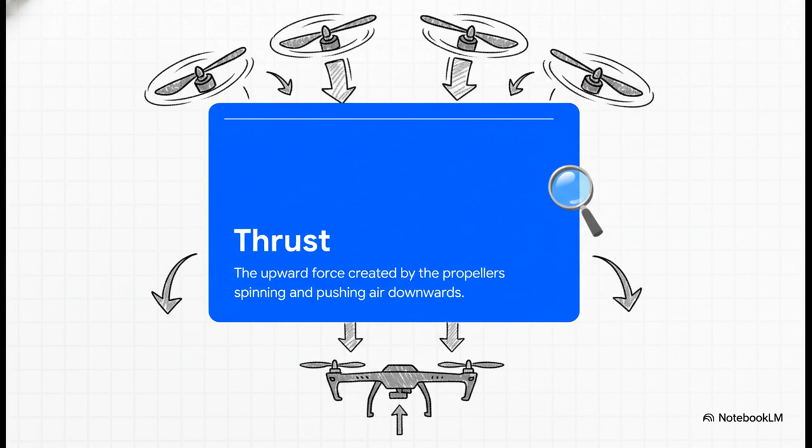The easiest way to think about it is that the propellers are basically really powerful little fans. They're spinning like crazy, grabbing huge amounts of air and shooting it straight down. But wait a minute, if you're pushing air down, how does that make the drone go up? It seems a little backward, right? Well, the secret sauce is all in the shape of the propeller blade. Take a look at it here.

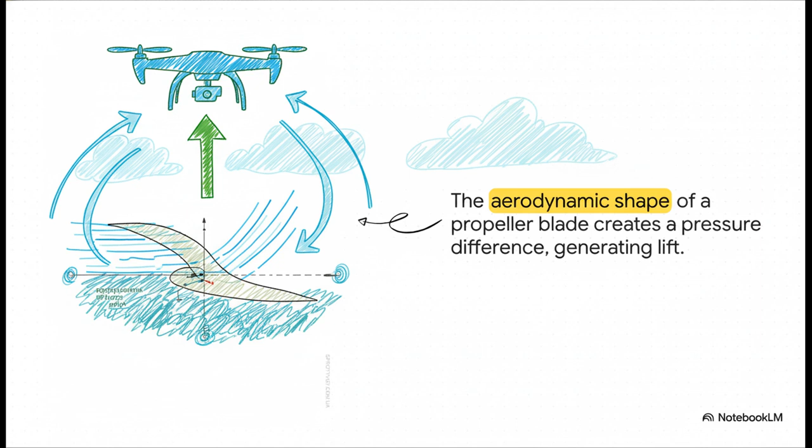It's not just a flat piece of plastic. It's shaped like a tiny little airplane wing, what's called an airfoil. As that blade slices through the air, its curved top makes the air have to travel a longer, faster path than the air going underneath. This creates a pressure difference: you get low pressure on top and high pressure on the bottom. And what does that high pressure do? It pushes up. That's lift.

This is a textbook example of one of the most famous laws in all of physics, Newton's third law. You've heard it a million times: for every action, there's an equal and opposite reaction. The action here is the props shoving a whole bunch of air down. The reaction, the air shoves the drone right back, but up. The drone is literally climbing up a ladder of air that it's building for itself as it goes.

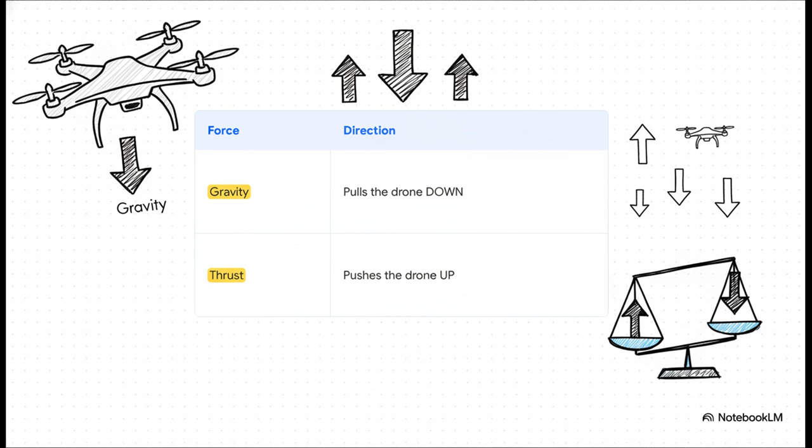How cool is that? So really, flying just boils down to a simple tug of war. You've got gravity pulling the drone down, and you've got thrust pushing it up. When the upward thrust from those 4 propellers is stronger than the downward pull of gravity, the drone goes up. Simple. And when those two forces are perfectly, exactly balanced, that's when you get that magical-looking hover.

All right, so we've solved problem number 1, we're off the ground. But now we have a whole new can of worms to deal with. You've got 4 motors spinning like crazy. What's to stop the body of the drone from just spinning out of control in the opposite direction? Seriously, think about it for a second. If all 4 of those motors were spinning the same way, all that twisting force, that's called torque, it has to go somewhere.

And where would it go? Right into the drone's body, turning it into a little quadcopter Beyblade. It would be totally, completely unflyable.

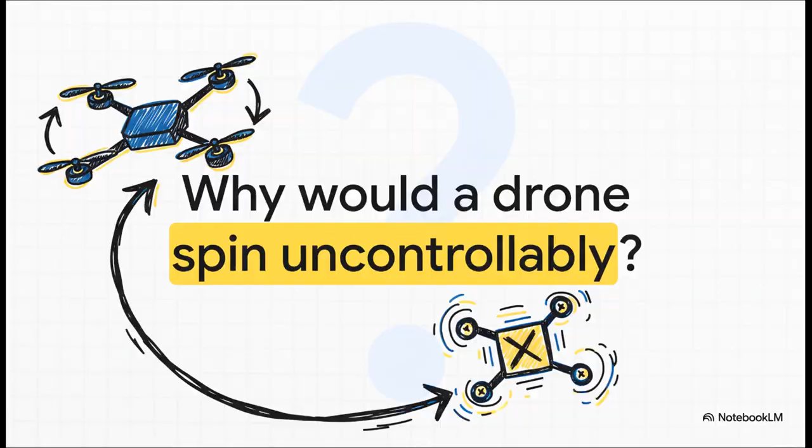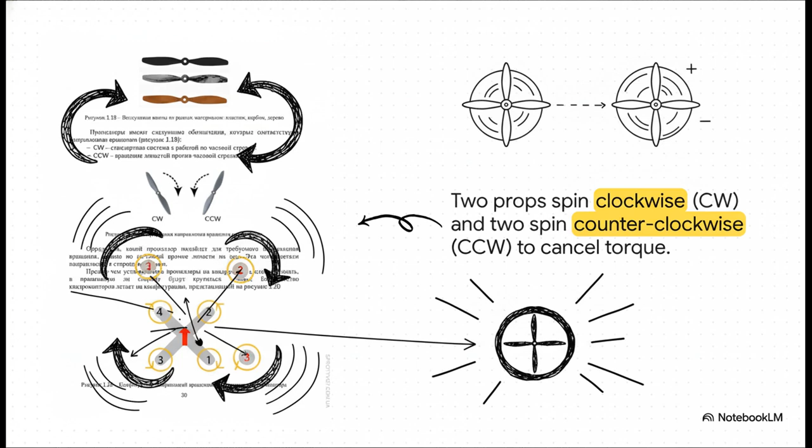But the solution to this is so simple, it's actually genius. Check out the diagram. Instead of spinning them all the same way, they spin 2 of them clockwise and the other 2 counterclockwise. So the twisting force from one pair is perfectly canceled out by the twisting force from the other pair. They just negate each other. And the result? No spin, just a rock-solid, stable platform hanging in the air.

Okay, so we've got a stable hover, that's awesome. But let's be real, a drone that only hovers isn't all that useful. The real fun, the real magic, is in the movement. So how do we take this perfectly balanced system and tell it to go somewhere, and fast?

It's actually pretty counterintuitive. You do it by unbalancing everything, but in a very, very controlled way. Every single movement a drone makes, every turn, every tilt, every forward sprint, it all happens because it's deliberately creating an imbalance between those 4 motors.

The easy stuff is pretty straightforward. You want to go up? You speed up all 4 motors at the same time, more thrust. You want to come down? You slow them all down together. And to get that perfect hover, you just find that sweet spot where thrust and gravity are perfectly matched.

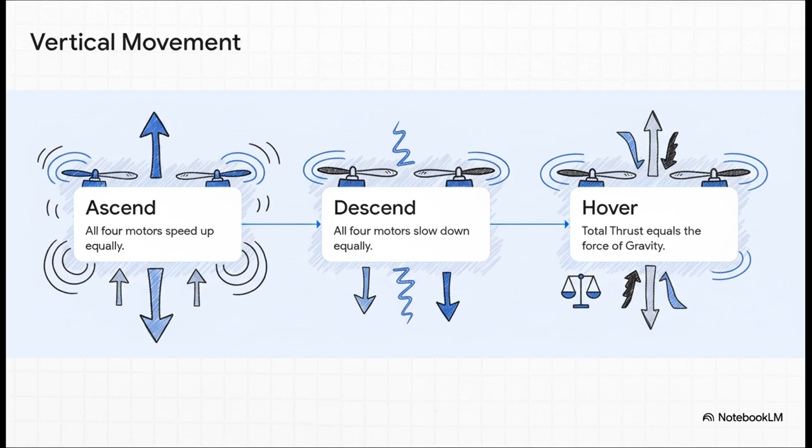But what about going forward? Okay, this is where it gets really smart. To make the drone move forward, that's called pitch, all you do is speed up the 2 motors in the back. That creates more lift in the rear, which naturally makes the drone tilt forward. Now think about it, the propellers are still pushing down, but since the drone is tilted, down is now also slightly backwards. So the reaction force pushes the drone up and forward. The more you tilt it, the faster you go.

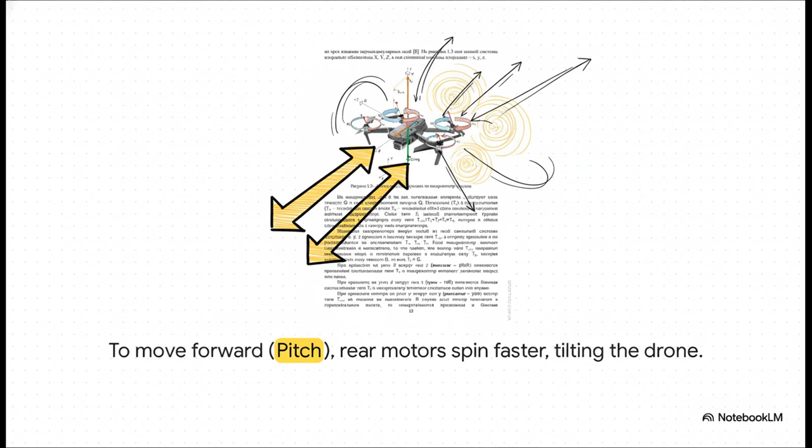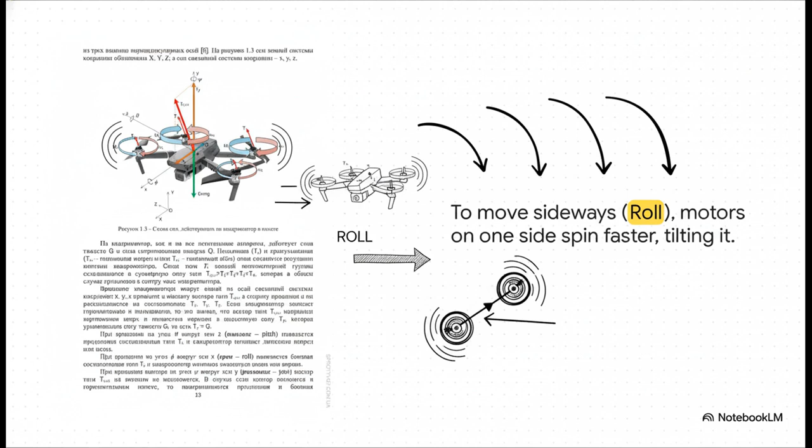And moving side to side, which we call roll, works the exact same way. Want to zip off to the right? Just tell the 2 motors on the left to spin a little faster. The drone tilts to the right and bingo, that redirected thrust pushes it sideways. So let's recap real quick: to go forward, the back props speed up; to roll right, the left props speed up.

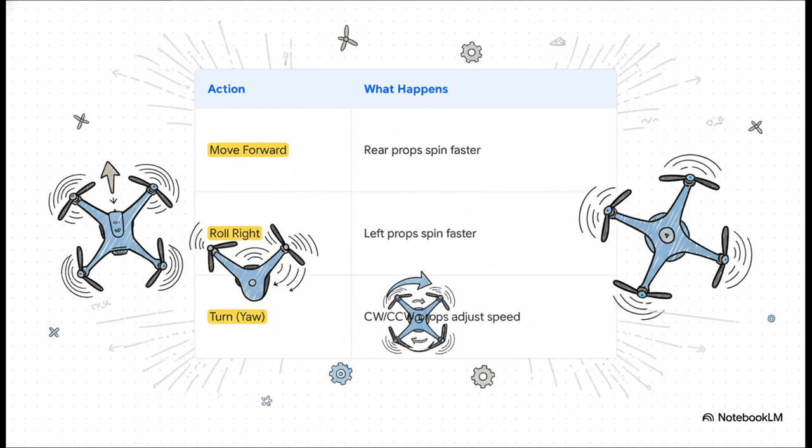And what about turning in place? That's called yaw. For that, you mess with that perfect torque balance we set up earlier. You speed up the two props spinning clockwise and slow down the two spinning counterclockwise. This creates an intentional, controlled spin, letting the drone pivot perfectly on the spot.

Now, I know what you're thinking: this sounds insanely complicated. There's no way a human pilot could make all those tiny constant adjustments fast enough to keep this thing from just flipping over. And you're right, we can't. That's why there's one last absolutely critical piece to this puzzle, the drone's brain. And that brain is called the flight controller. It's basically a tiny computer that acts as the drone's central nervous system.

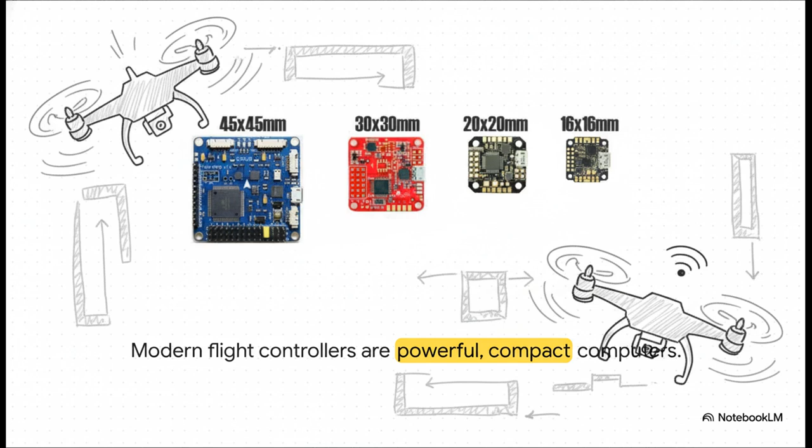It's doing a million things at once. It's listening to what you're telling it to do with the controller, it's constantly reading data from its sensors, and it's performing thousands of calculations every single second just to tell each motor exactly how fast it needs to spin at that exact microsecond. And this is what one looks like. These little boards are just amazing pieces of technology, super powerful microcomputers that have one job and one job only: keeping the drone flying perfectly. The fact that these have gotten so small, so fast, and so powerful is the number one reason why modern drones are so incredibly stable and, frankly, so easy to fly.

So how does this little brain know what's happening in the real world? It has senses, just like we do. It has tiny little sensors on board. A gyroscope feels any kind of tilt or rotation, and an accelerometer feels any change in speed. Together, they're constantly feeding data to the flight controller, telling it, hey, a gust of wind just pushed us, or whoa, we're starting to drift, and the controller can react instantly to fix it.

So, when you put it all together, it's pretty clear, right? It's not magic, it's just this beautiful, elegant dance of science. And by mastering these principles, we've unlocked a ton of incredible, real-world uses for this technology. I mean, you see them everywhere now. They're used for those jaw-dropping movie shots, for search and rescue missions in places people can't easily go, for delivering emergency supplies, even for checking on farms to see how crops are doing. This tech is really changing the game in so many fields.

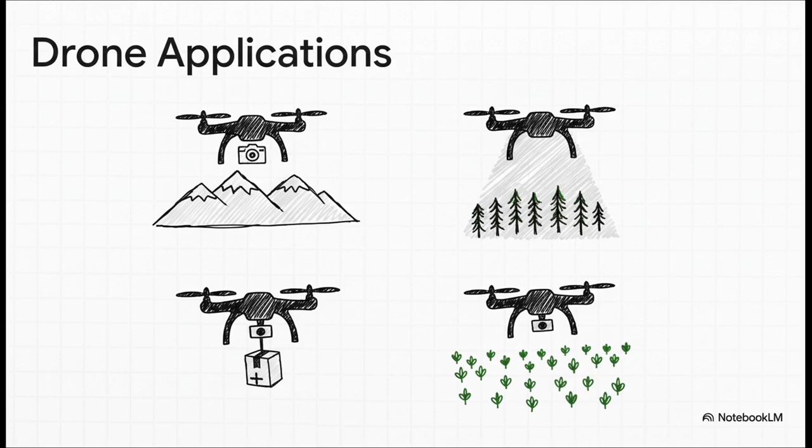And it all boils down to a few key things. You've got physics, with Newton's third law letting propellers create thrust. You've got aerodynamics in the shape of the blades, and you've got computer science with that tiny flight controller acting as the conductor for the whole orchestra, running complex algorithms and making thousands of adjustments every second. It's a perfect symphony of science and engineering.

So, at the end of the day, we've basically figured it out. We cracked the code. We took the laws of physics, added a whole lot of computing power, and taught these little machines how to fly with incredible grace and precision. Which, of course, leaves us with one really exciting question to think about: now that we've taught them how to fly, what are we going to teach them to do next?